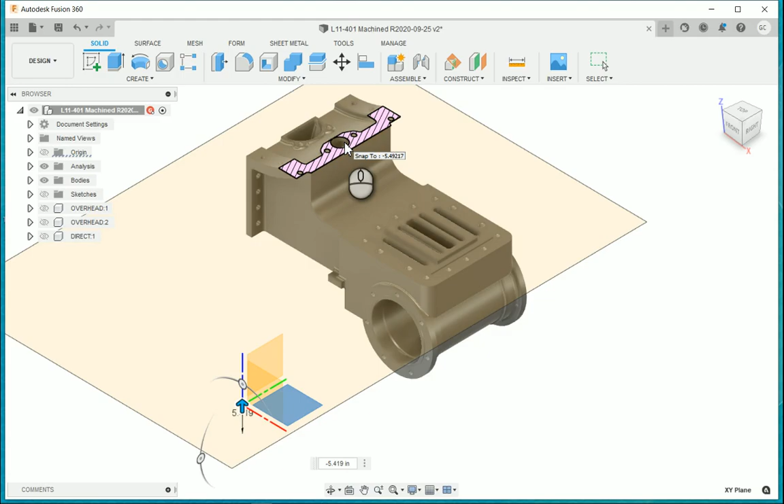As I slice down through the casting with a horizontal plane, you can see two openings in the saddle area of the smoke box. The first one takes the live steam from the boiler, and as we move downward we see that it splits into two horizontal passages. So here it is here, and now it splits off into two horizontal passages that go out towards the cylinder and then returns to a vertical direction and forms an admission port in the valve chest.

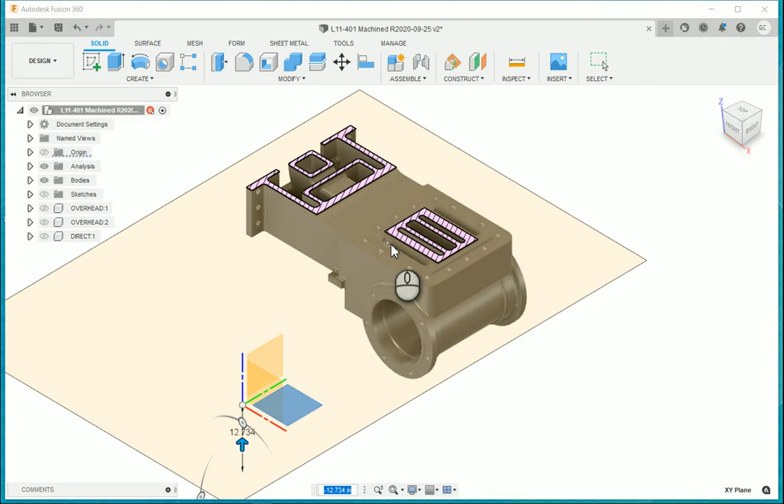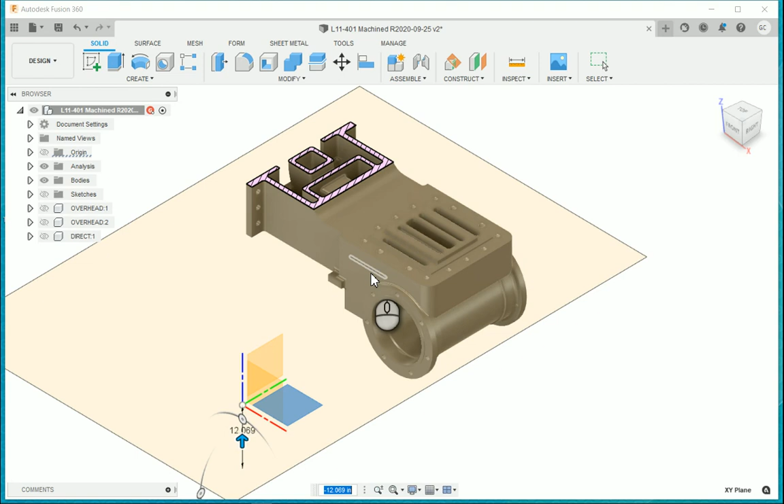The other opening in the saddle area is for the exhaust steam, and it's this central D-shaped opening here, that also travels vertically down and then horizontally through the middle of the casting, and then connects vertically to a large central port in the steam chest for the exhaust steam.

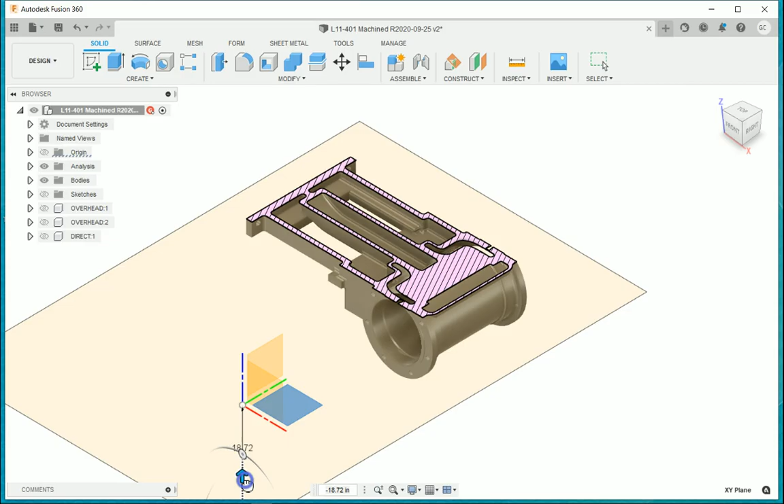In addition to those two important passages, there are two slots cut into each end of the cylinder. You can kind of see here and over here, where the steam can travel back horizontally and then again vertically up into the valve chest.

And so the slide valve can use these openings to slide towards one end so that the live steam can enter into the steam port of the cylinder and provide live steam to that end, while the exhaust steam is able to travel through the opening in that end and through the steam port and then into the exhaust port and out the smokestack.

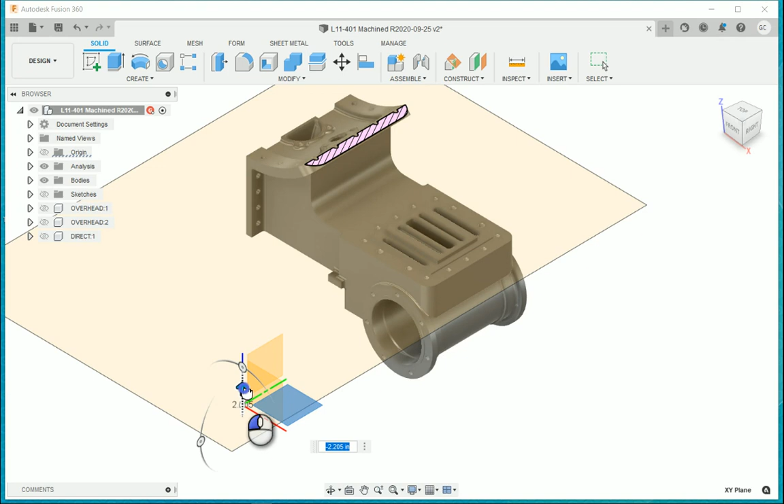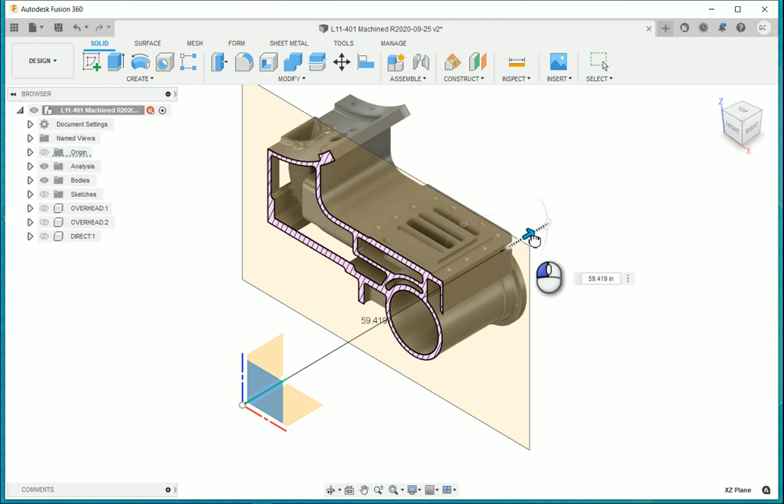Another way we could look at this to get a better sense of the openings and the ends of the cylinders is to use a vertical plane and to actually slice into the ends of the cylinders, where you can see the slot beginning and then traveling horizontally over the top of the cylinder, and then again vertically up into the valve chest area.

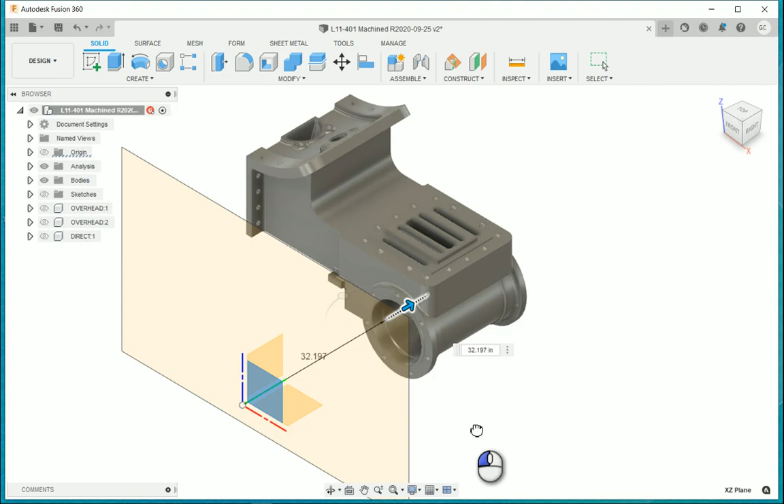So this is a pretty powerful visual tool, so that you can visualize and see actually what's inside these cylinder castings. They look pretty solid from the outside, but as you can see, there's a lot going on inside. And all that going on inside is pretty difficult for both the design and the maker of the patterns, and then the casting process itself.

The passages require a core box to be made, or a core that's in the shape of those passages, and that'll be made out of a sand that can then be broken out once the casting is made. So these are not an easy job to design or to cast. While these were common back in the day, today they are not at all common, and the chances for errors somewhere along the line are pretty high. So this process of being able to model them and look inside and to check all the dimensions is a very, very nice tool to ensure that we're going to get a high quality casting that's correct the first time.

We're very excited to be working with Dakota and appreciate their willingness to take this on. We're also excited that many others have found this project worthy of their support, and very grateful that we will all be rewarded with a new Maine-built steam locomotive to enjoy for many years.